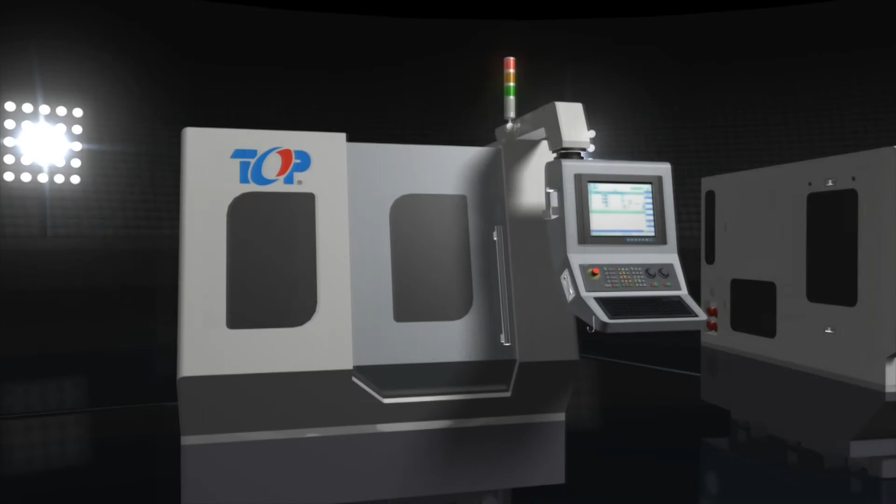Technology, consistent persistence. Optimization, promotion motivation. Professional, leading factor.

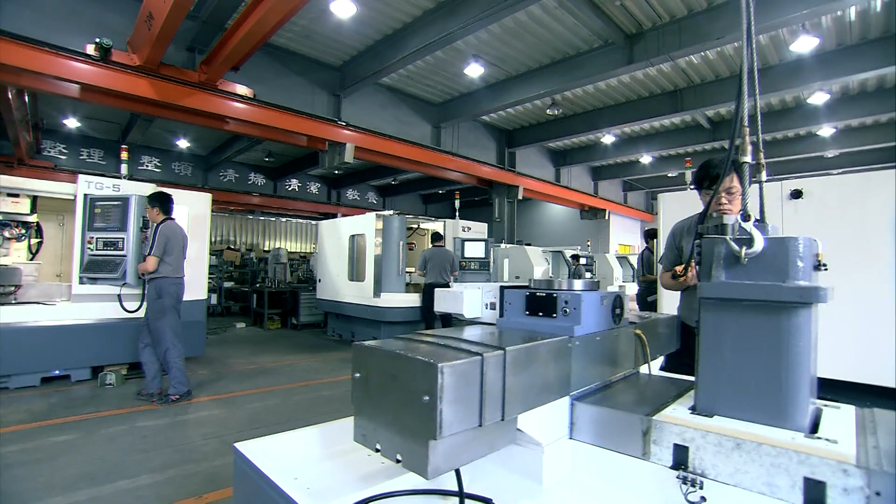Since the establishment in 1980, Topwork has been engaged in the pursuit of enduring improvement in quality and service to the esteemed customer. And these principles had successfully led Topwork Tool Grinder into the global tool grinder market.

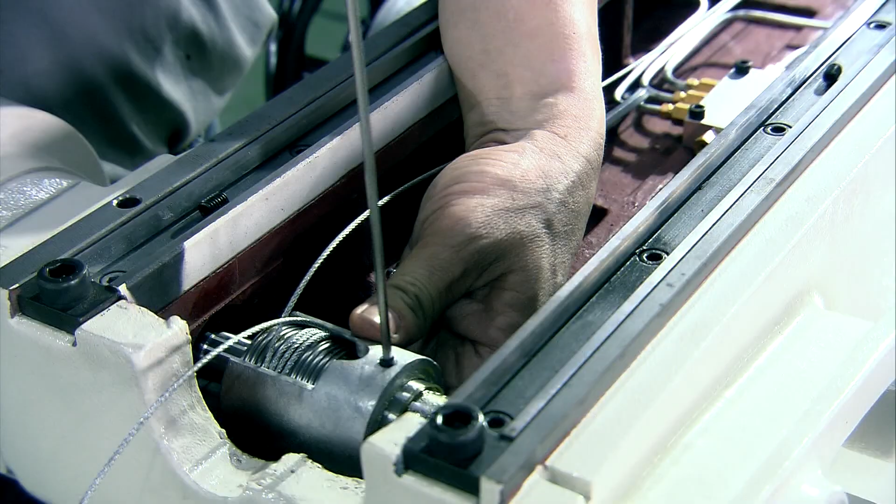In unison is the consistent centripetal force for each member in Topwork. In addition, Topwork has extended the unison to the partnership between our clients and agents in order to create a win-win benefit.

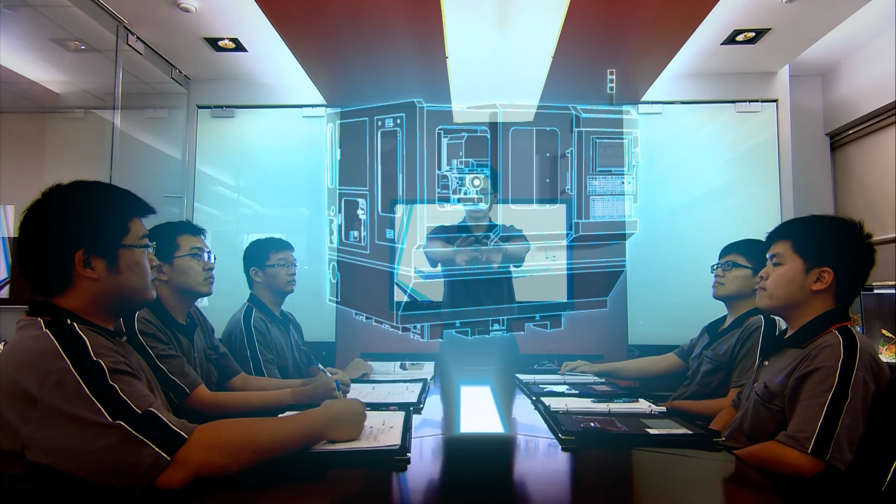Excellent R&D and QC. It's been a long time since Topwork has experienced the processes from products R&D, brand establishment to brand optimization, and made obvious metamorphosis and considerable progress in each stage.

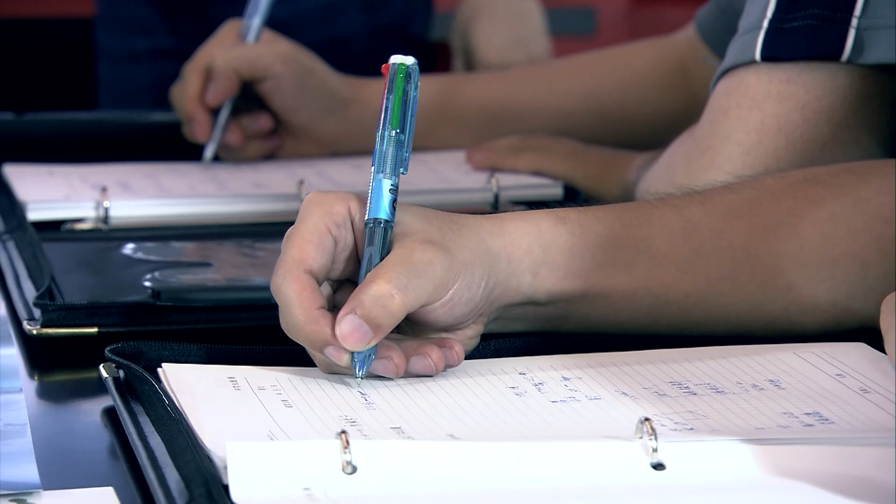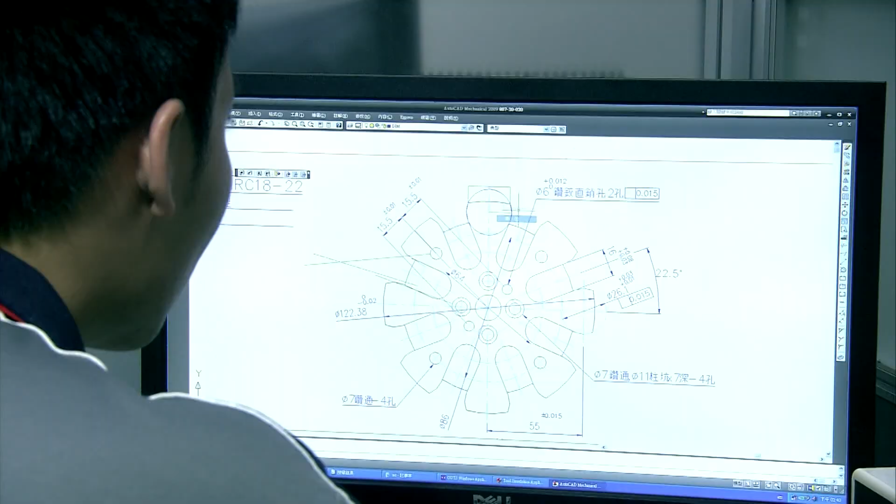Topwork has been striving for perfection in products with excellent R&D spirit. Together with unceasing R&D of the newest domestic and foreign cutter grinders, and to offer complete and consistent service from design, production, marketing, installation, maintenance, and parts supply, aims to become our client's best enterprise partner.

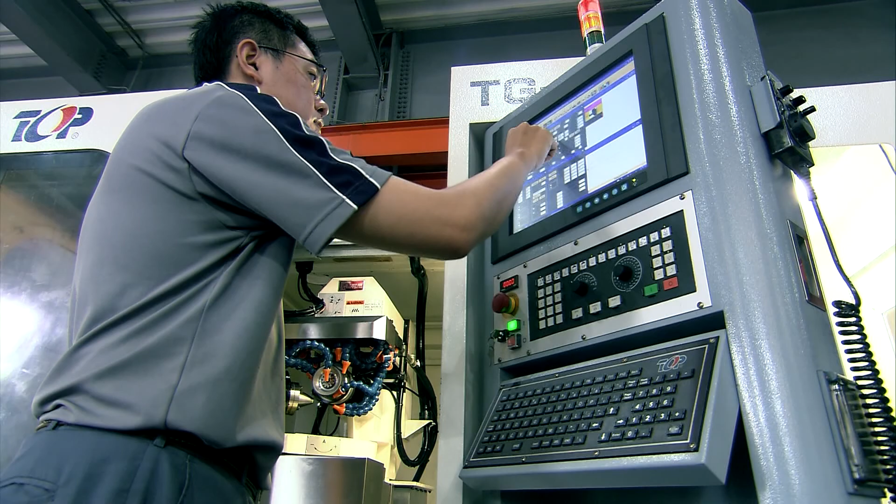Under our severe requests for quality insistence, Topwork has great public praise for the best choice of providing customers with cutter grinders.

We have a specialized R&D team and the most precise inspection equipment to comprehensively assure our products for a zero failure rate.

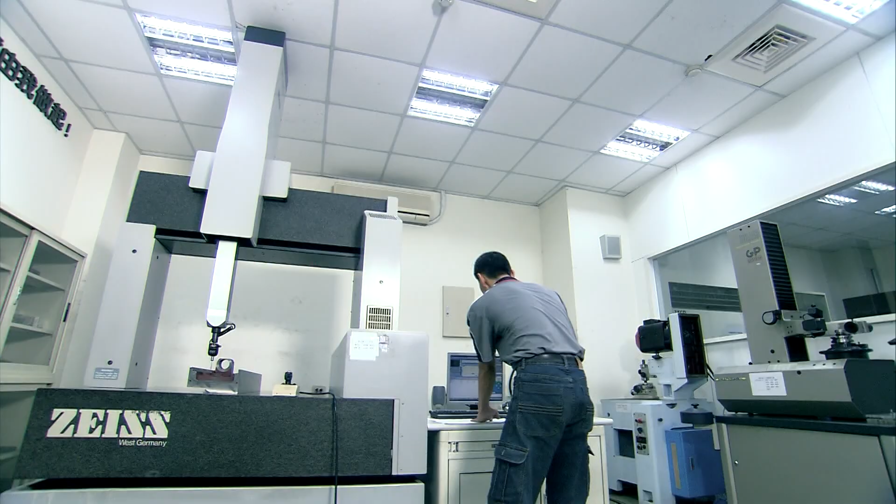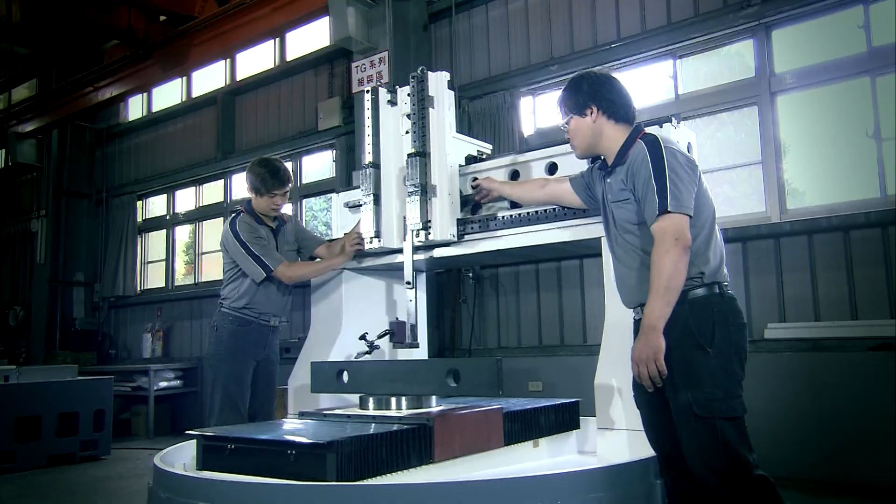We not only pass through ISO 9001 certification, simultaneously we are qualified CE certification permission for our products and win our government R&D fund for 3 successive years.

In these aspects, such as quality control, administration and product management, customer services, and technical support, we were requested to carry out the ISO standards.

Innovation, creativity, and creating a new situation. The remarkable organization framework, complete education and training, and the best welfare measure become Topwork's foundation for durative flourishing growth.

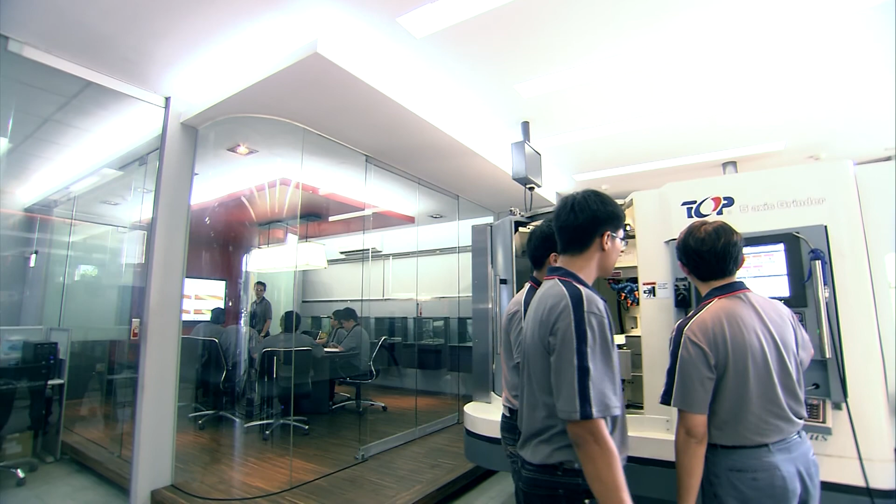While expanding our enterprise systems group unceasingly, we often introspect together to thoroughly carry out staff fundamental training for instilling rigorous and specialized knowledge and skills into our staff.

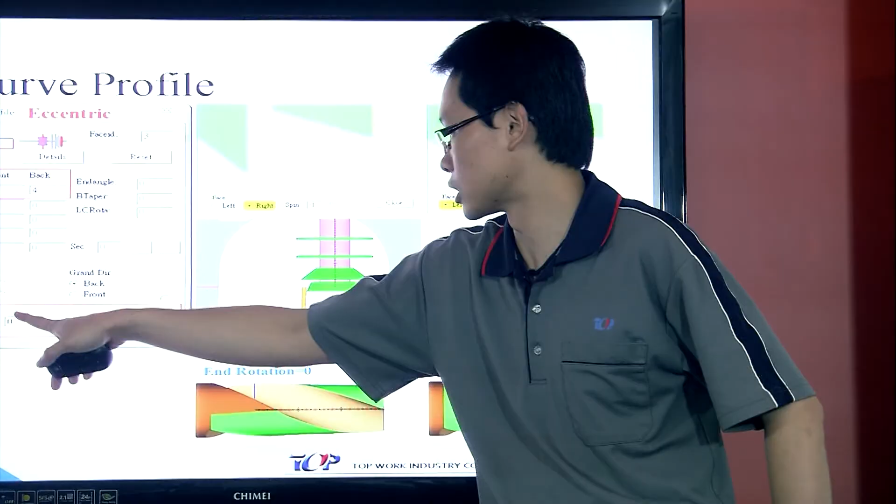Through effective communication among all the departments, we systematically work out the plan of employee education and training to improve employees' professional competence and actively consult with customers and suppliers to get a 3-way win cooperation for enterprises, customer, and supplier. Topwork's Tool Grinder Range.

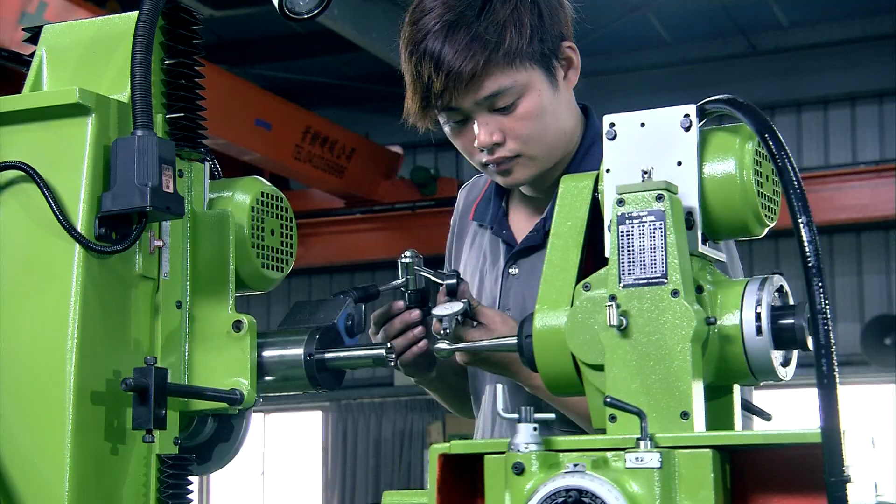Topwork's Tool Grinder Range includes universal type and CNC type and mainly provides to the tool factories, especially those who are producing and resharpening the tungsten carbide cutter grinding.

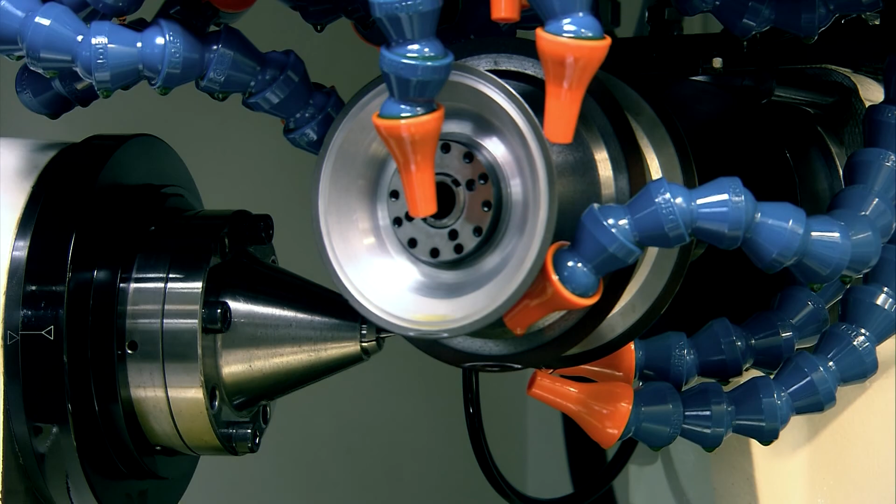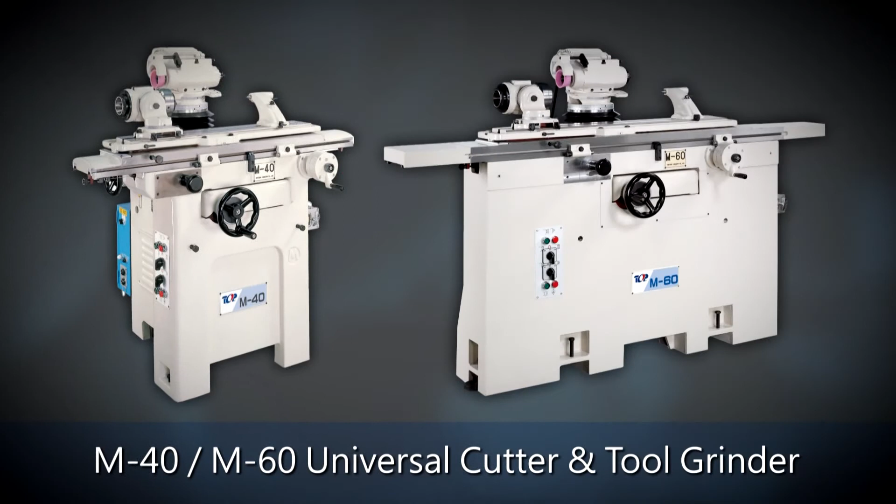Universal type. M40, M60 universal cutter and tool grinder. CM2, CMA monoset cutter and tool grinder. HS16 HOB sharpening machine.

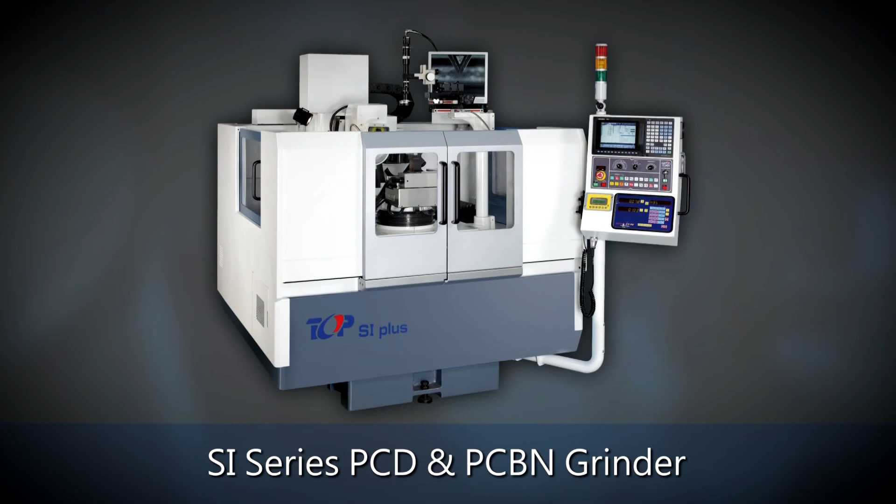Special tool grinder. TD series diamond wheel truing and dressing machine. SI series PCD and PCBN grinder. Broach and helical shaper resharpen machine.

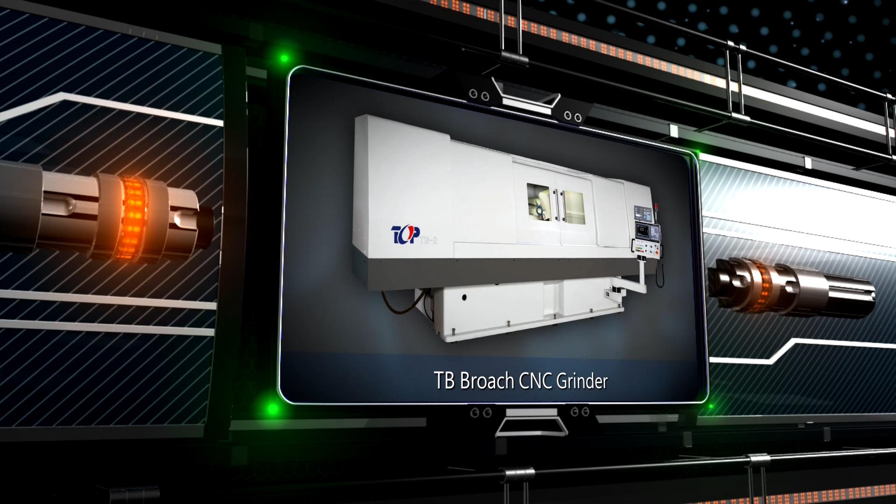TB broach CNC grinder. Helical shaper cutter resharpening machine.

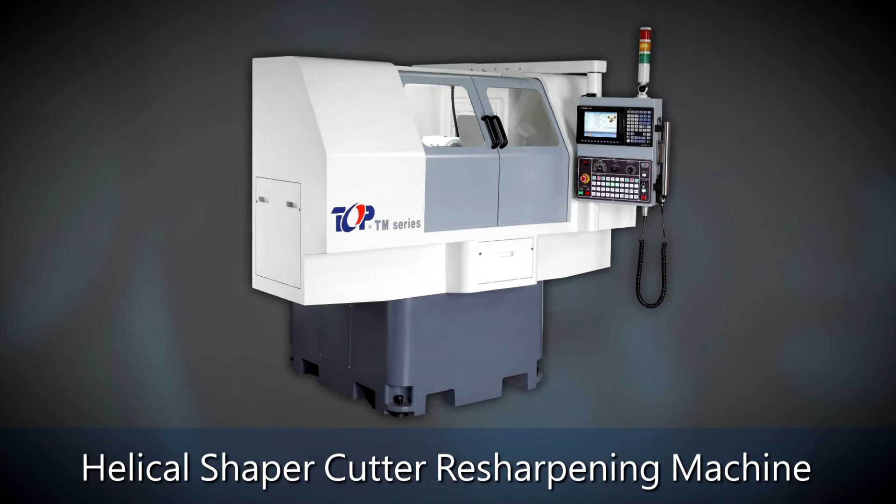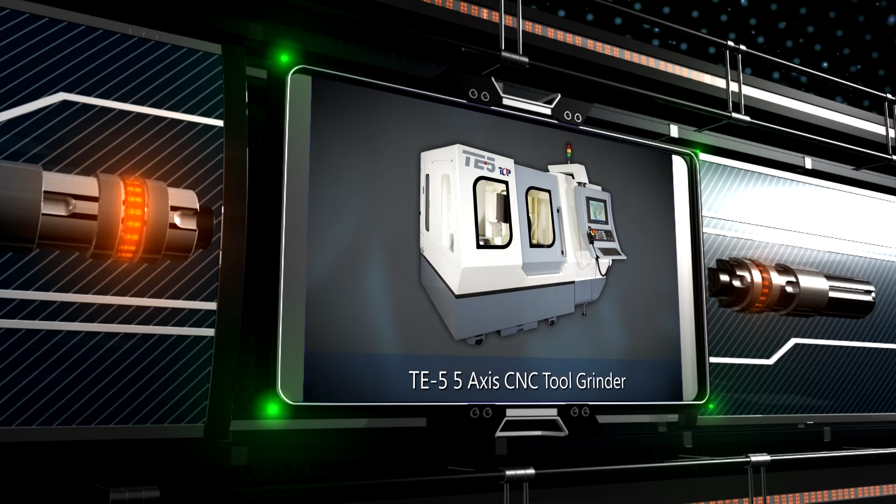CNC tool grinder. TG5 plus 5-axis CNC tool grinder. TE5 5-axis CNC tool grinder. TG4 4-axis CNC tool grinder. TM Series CNC cutter and tool grinder.

Especially the 4-axis and 5-axis CNC tool grinders are our major products. Our products are widely exported to the USA, China, Japan, the Middle East, Europe, Russia, and Southeast Asia.

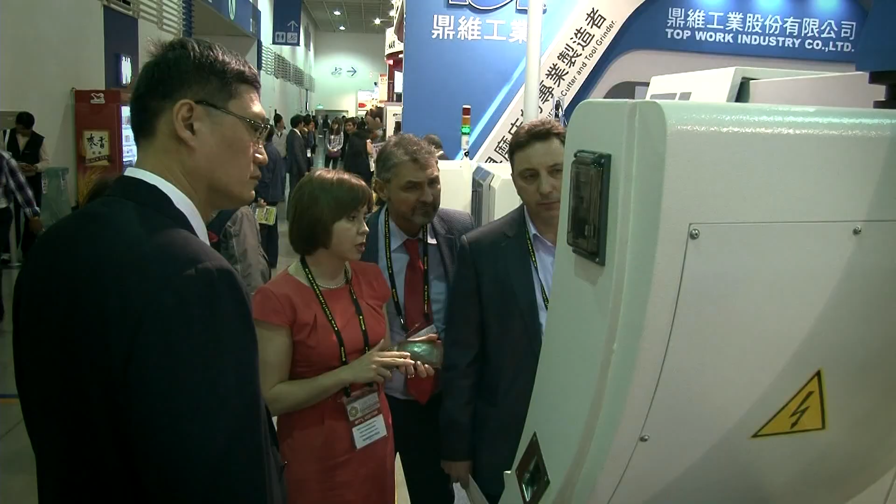Nowadays, Topwork is looking for more chances to work with customers through participation in large-scale significant international exhibitions in the USA, Germany, Japan, mainland China, and Taiwan, and expects to provide customers with more efficient service through the Internet.

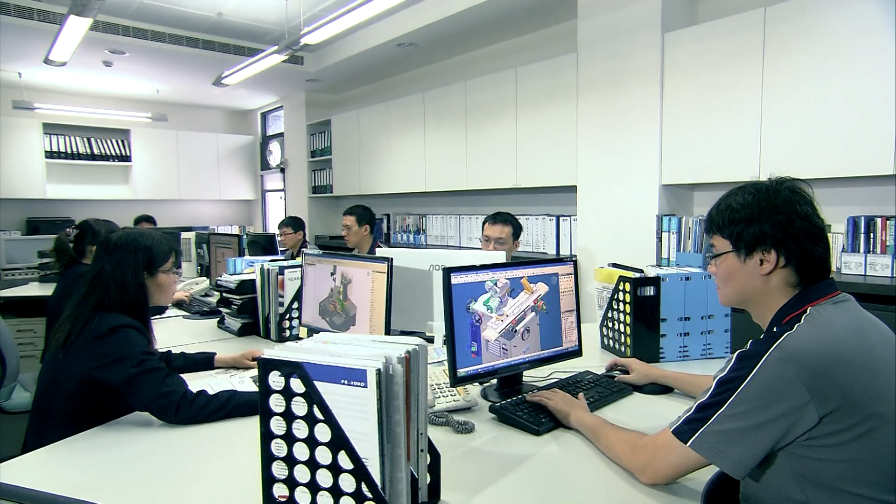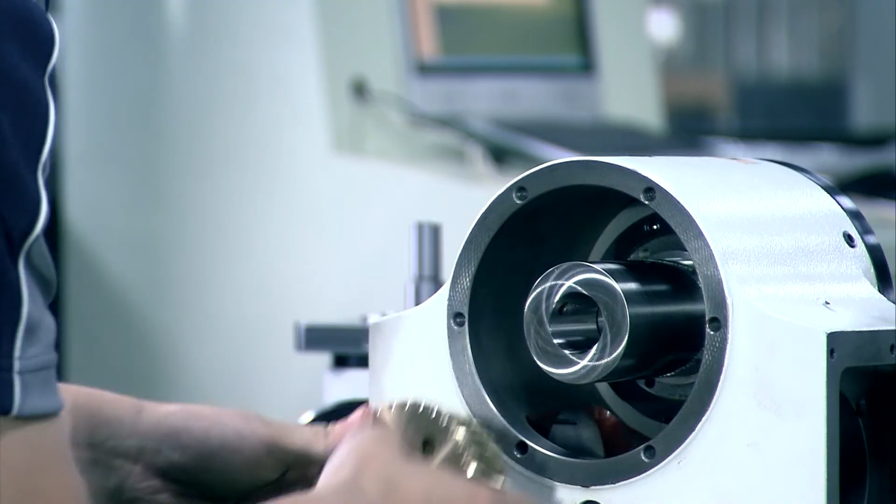Topwork thanks all customers for their trust and support during 40 years. In the process of fulfilling customers' requirements, we have professional know-how and innovation technique to improve product quality, to gradually establish a professional standing in the global cutter tool grinder market.

At the same time that we are devoting ourselves into creating socio-economic value, we never forget the importance of environmental protection and are engaged in eco-friendly activities.

As a specialized cutter grinder manufacturer, based on actual figures to create the brand Topwork, will continue to offer clients the highest quality products and to construct a forever management kingdom.